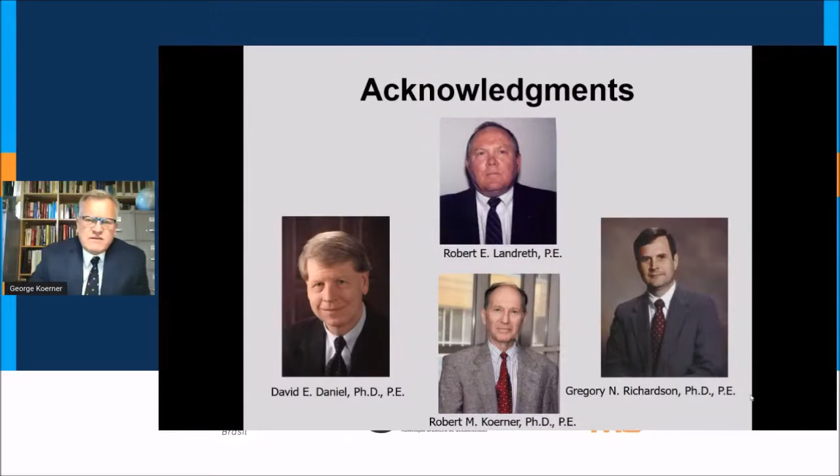For this work, I have to acknowledge these gentlemen, Professor Daniel, Professor Richardson, and Professor Koerner, all had a contract underneath Robert Landreth at the Risk Reduction Laboratory in Cincinnati. A lot of the information I am presenting to you is from their work, and I certainly need to acknowledge and thank them as my mentors.

As far as the background for this is concerned, there are publications supporting what I am giving to you. The reference I would suggest you obtain is the Daniel Koerner Waste Containment Facilities. It's an ASCE publication. However, you can also get this document, just about 90% of it, free of charge from the US EPA off of the internet.

The objectives here, and we have to be very clear what the objectives of all this work I'm describing to you is, it's certainly to minimize leakage, and the emphasis here is on the word minimization. Realize that the target is to get no leakage, but in truth, the targets are to get leakage below 50 liters per hectare per day, or that equals 5 gallons per acre per day.

The QA personnel on site, whether they be field technicians, inspectors, or QA monitors, are there to improve the state of the practice of what's going on, and also to help out with communication of the stakeholders on the project. And please realize that we are protecting the environment. We are truly stewards of the environment, and it's our task with this series of events to certainly minimize the risk to the environment.

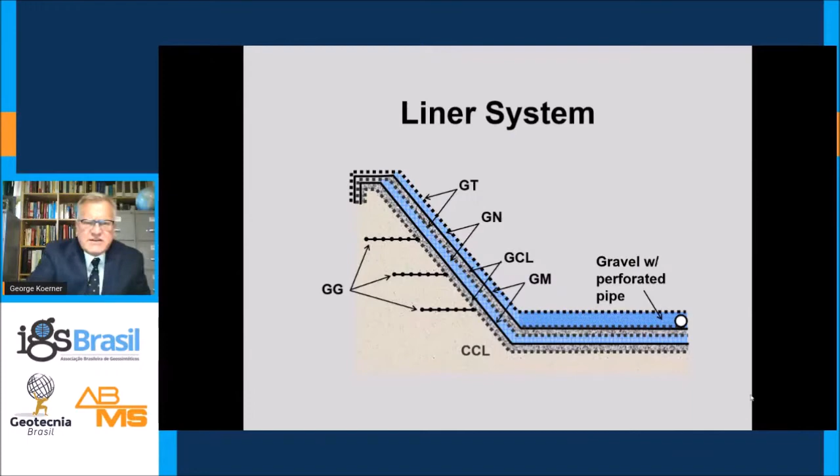Liner systems that are out there, I realize they're different depending on where you are, but double composite liner systems are typical in the United States. Here you see that in cross section. We start from the ground up, the subgrade, and then typically a geomembrane, GCL, then a drainage net, a geotextile over top of that for a filter system.

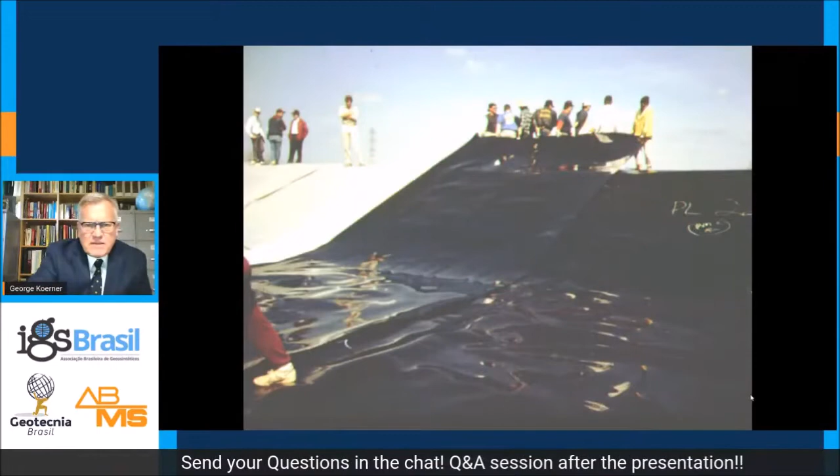This is the detection system, then another membrane GCL, which is a composite liner system over top of that. And here you see the entire liner system in its glory. You see the subgrade soil, the GCL, the geomembrane, the net, the textile, the GCL, the membrane, and then a heavy needle punch non-woven textile system. This liner system is replete with geosynthetics. We're typically doing long longitudinal cells, and it's staged and managed construction.

Now let's go to the top side. You see again a composite liner system, typically a GCL with a geomembrane over top of it. You have a gas venting layer underneath that. And then top side, you typically have a drainage geocomposite and then some sort of veneer reinforcement over top, and quite possibly a geosynthetic erosion control material over top of that.

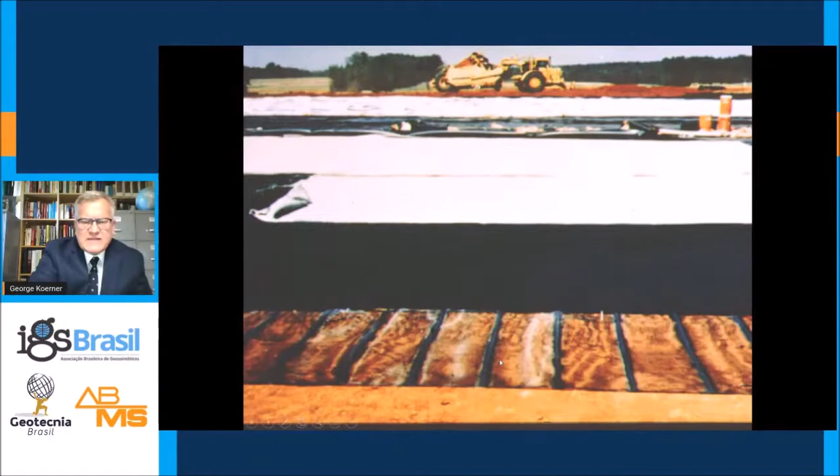They're complex covers as well. This happens to be at a low-level nuclear facility at Savannah River. You see the cross section. The geogrid was even installed for minimizing differential settlement in the cover. So you have the cross section of the landfill. Here's the cover system. I even held back a little bit.

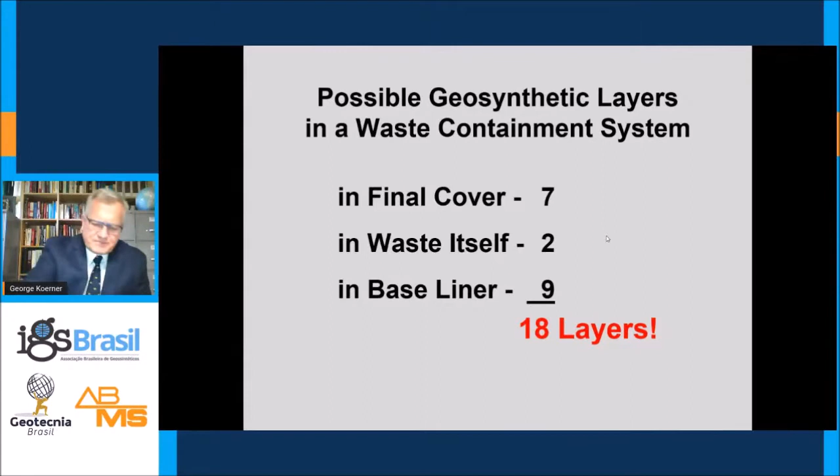There could be geogrids or geocomposites inside the waste mass if you wish. But at a minimum, the final cover typically has 7. Inside the waste could have 2, and then the base liner has 9. That's 18 layers, folks, of geosynthetics. And if you're in the waste containment business, I argue that you're in the geosynthetic business. You have to be competent in this, and you have to know that these materials are tricky. They're not self-evident, and we'd like to show you some of these tricks in regard to this presentation today.

When you have barrier systems, they typically in a natural material were compacted clay liners. For geosynthetics, they're usually geomembranes and GCLs, or a composite of the two. The barrier system geomembrane-CCL, and then geomembrane-CCL-GCL, is quite typical. As far as drainage layers are concerned, they're typically sands and gravels in the natural environment. These have been replaced in large part by textiles, nets, and geocomposites. In regards to filters, we typically have sand, and now we have a plethora of geotextiles which can be used in this case.

You should understand the organizational structure of the QA component, QC component. These are the stakeholders, or the players, so to speak. You have an owner of the facility, a designer of the facility, the QA organization, which is typically separate. Then you have a permitting agency - it could be both state and federal - a project manager and contractor, and then obviously the soils component as well.

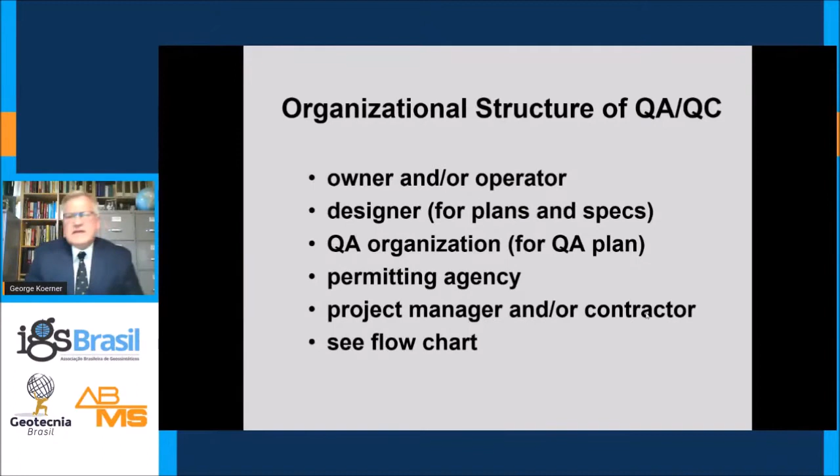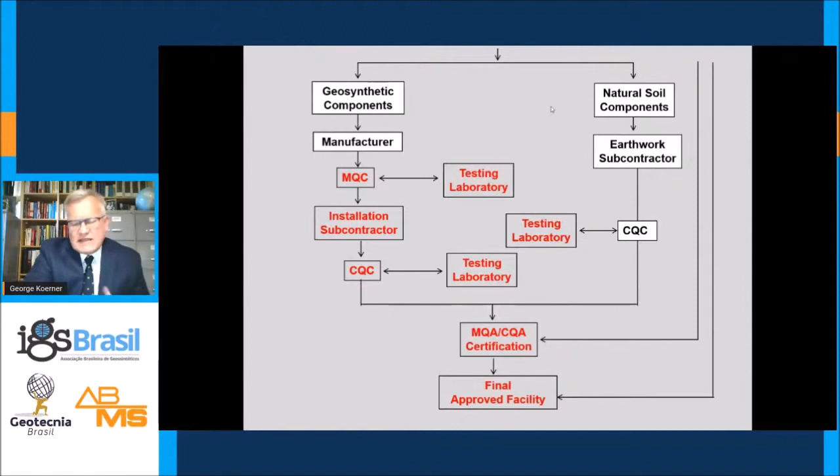This EPA document shows this flow chart and the interactions of these different stakeholders. You see the initial portion of the chart here, and then subsequently the flow chart breaks into two paths, one with geosynthetics and the other with natural soils. It all has checks and balances associated with it, and all has approvals of the facility, both by the owner who pays for it and subsequently the regulator, which finally approves it.

These stakeholders typically have a minimum qualification associated with it. The designer typically has a PE license. The manufacturer has experience, and typically there's a given number of 1 million square meters of material produced. The installer has experience as well and might have a certification. MQC is typically ISO 9000.

MQA - the regulations are typically silent in this regard, but we're seeing them being pressed a little more as far as CE marking. CQC, as far as construction quality control, this is IAGI certified. We're seeing the installers, and many in South America are having this IAGI certification. And as far as the CQA, PE or GCI ICP certification for the techs.

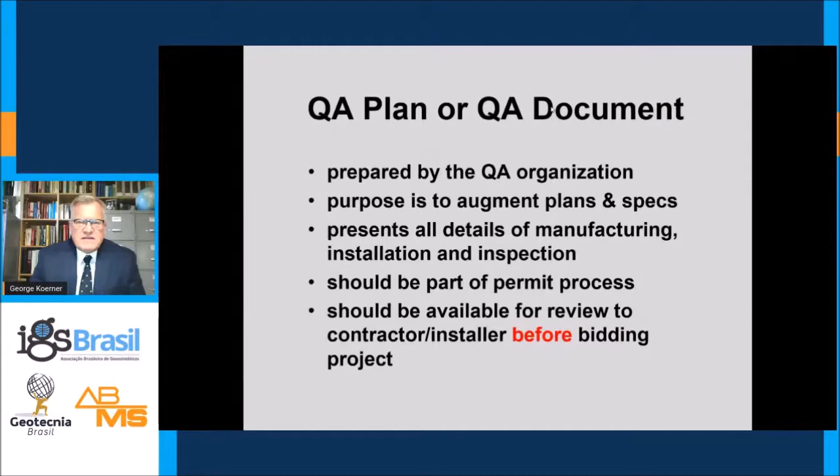There should be absolutely no surprises once the dirt starts flying or the polymers start flying. There is much documentation associated with this.

Daily inspection reports, daily summary reports, inspection and testing reports, any problems and corrective actions, drawings and records, photographs, final document certs, document control list, storage records, and on and on.

All of this is now being monitored by project managing scheduling software. Just like we're using remote and virtual ideas, this is paramount now in construction quality assurance. You see people out there with laptops and iPads making these documents, and there's a whole cottage industry supporting that.

Project management and scheduling involves meetings: a pre-bid meeting, resolution, pre-construction, and progress meetings. All of this, which I've just described to you, is freely available in the EPA 600 R-93 document, which is available online and will give you about 90% of what the ASCE Koerner Daniel document gives you.

So that's a brief introduction, just a view from 10,000 feet of what we're going to talk about in this presentation. I realize most of you on the line are very familiar with geosynthetics and containment systems. However, I would be remiss if I didn't go through it a little bit to get everybody on the same page about these polymers used in below ground construction.

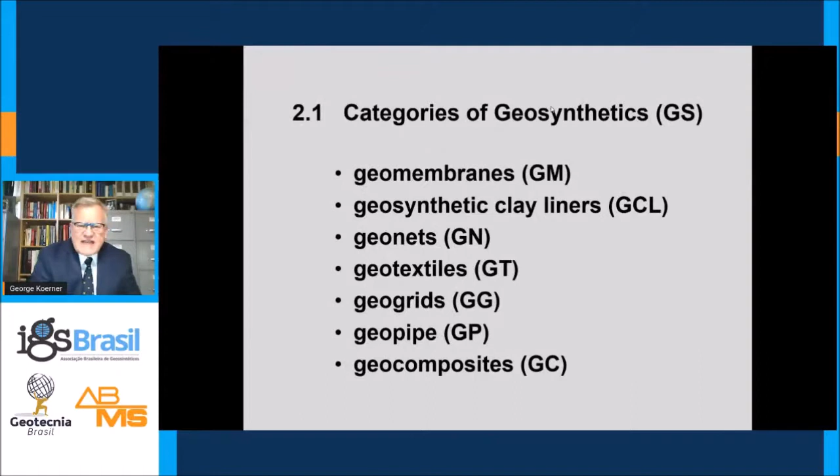Typically, the categories are membranes, GCLs, nets, textiles, grids, plastic pipe, and geocomposite. What I'm going to speak mainly to you about is the geomembrane, which is the polymeric barrier used in these containment systems. It can be smooth or textured.

It can be scrim reinforced. It can be different colors. Most of them are black, but some are white, and we'll go through all of that.

There is GCL, which is typically bentonite clay sandwiched in between two different geosynthetics. This clay swells profusely. It can absorb 300% moisture content, and it supplements or replaces a compacted clay liner, and is used with the geomembrane as a composite liner system.

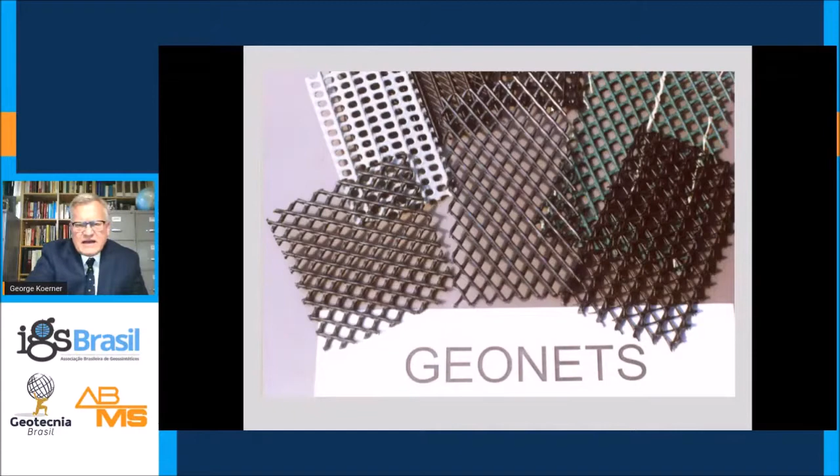You typically have geonets, or in Europe, they're called geospacers. These materials are three-dimensional, and they can transmit fluid, either gas or liquid, in the plane. They have a transmissivity associated with them. There's biplanar as well as triplanar nets, and it works well for leachate collection and removal systems, as well as detection systems.

Probably the oldest of the geosynthetics are geotextiles, with two major varieties: non-woven and woven materials. They can solve a plethora of different issues, and certainly are well received and well used throughout waste containment.

Geogrids are three different types: punched and drawn, coated, which is typically polyester, and strap type. They almost always reinforce the soil.

Soils are notoriously poor in tension. Geogrids are excellent in tension. The composite of soils and geogrid can be equated to concrete and steel. Same scenario there—the geogrid, like steel, is taking the tensile forces.

There is plastic pipe. This can be perforated or smooth. It can be corrugated. Typically, the pipes that are available are polyethylene, HDPE, and PVC.

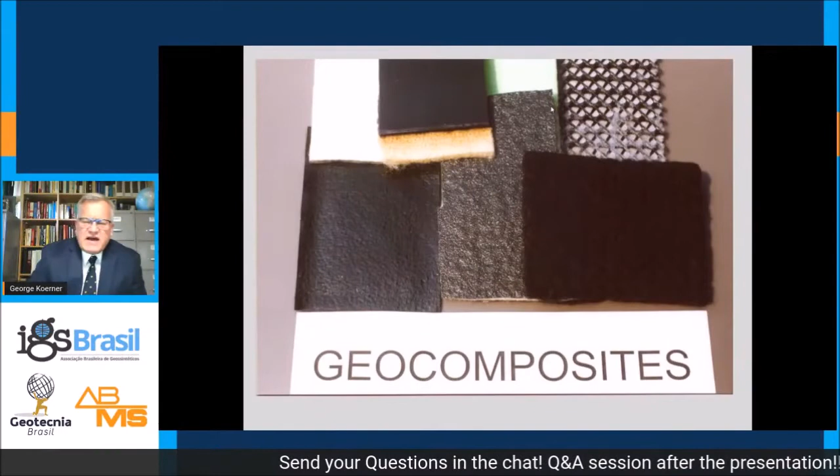You then can have a composite of these materials, which are addressed, forming just the endless array of geocomposites. You should know the primary function. Here you see the different geosynthetic types that we went through.

The primary functions are separation, reinforcement, filtration, drainage, and barrier. The geomembrane and GCLs will behave as a barrier. The net will behave as a drain. The textile can behave as many things, and it could even behave as a barrier if you coated it with a bitumen.

Geogrid is reinforcement. Geopipe is drainage, and then obviously a geocomposite acts as all of them.

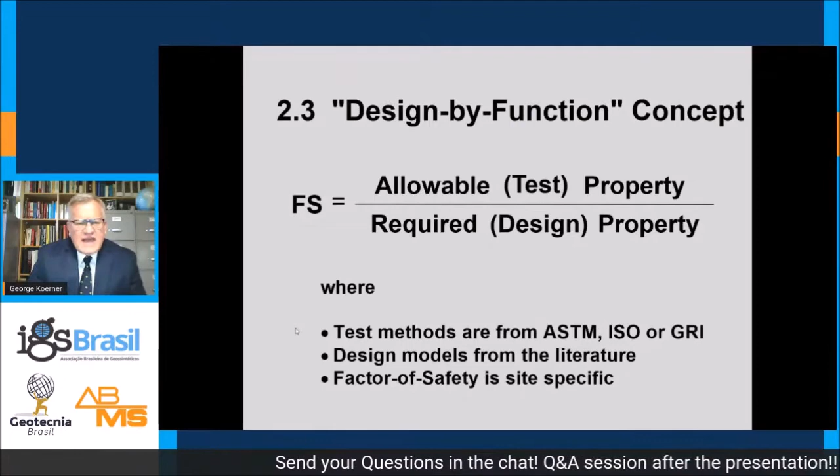This equation is how I would define an engineer: it's a factor of safety equation with a test property in the numerator. In the denominator, you have a design property. The test value is typically an ASTM or ISO test method, and the design value is typically, these days, a computer program.

You have testing issues. These are utilized through Committee D35 in ASTM or ISO TC 221. There are many standards which are available to you and essentially called out in specifications.

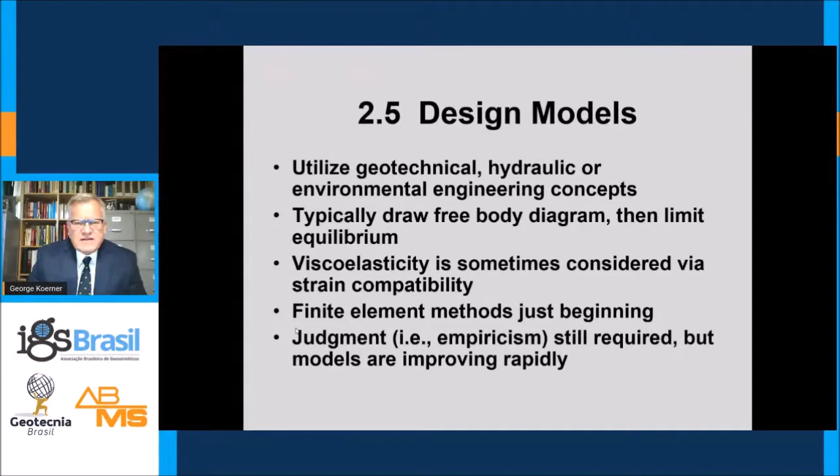As far as the design models, which are in the denominator of the factor of safety equation, they're utilizing geotechnical, hydraulic, and environmental engineering concepts. There's a litany of different programs available to you, and certainly some engineering judgment has to be used, not only in data entry, but also in the analysis of this.

When you go into a factor of safety, there are two critical elements associated with it. One is time—are these facilities temporary or permanent? And the other is severity—non-critical or critical. And I talk to people as far as criticality.

In regards to generic specifications, the current thrust is to move towards this and uniformity. This is a major effort at our institute, and please realize on geosynthetic-institute.org, these specifications are available to you. I should point out to you that currently these specifications are being translated into Spanish. Certainly they can be translated into different languages around the world, and Portuguese might be next.

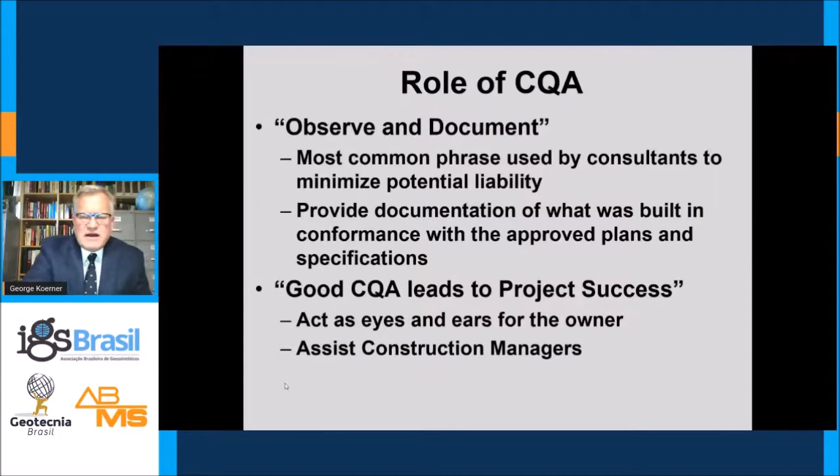The role of the QA personnel is certainly to observe and document. They're basically the owner's eyes out in the field. The consultants that provide these services are certainly trying to minimize potential liability, and they're providing documentation of what was built and did it conform to the plans and specifications. Good QA, though, is more than that. It leads to project success, and certainly it's an assistance to all the construction managers out on the project, and ultimately the owner thinks that it's a worthwhile expenditure.

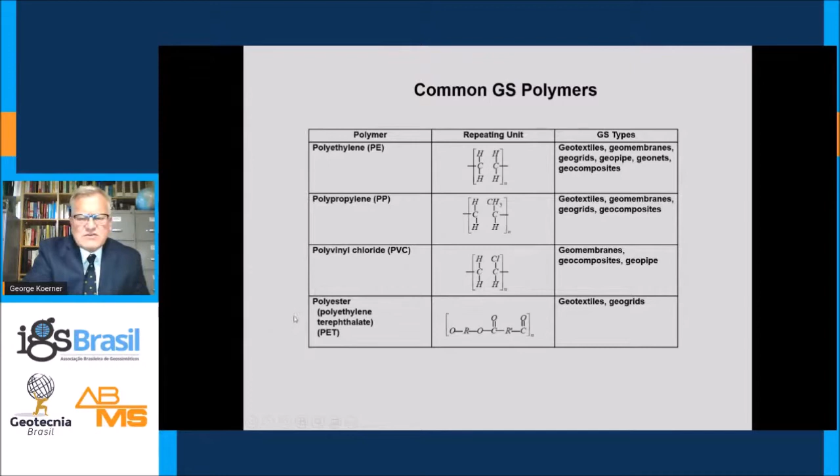Okay, now moving on past geosynthetics, I want to get into the geomembranes. These are polymers. These polymers are characterized by molecular weights which are extremely high, in the 10,000 to 100,000 range. You realize that geosynthetics use very few of these polymers, almost commodity polymers. The two materials up in the top are polyethylene and polypropylene. These are characterized as olefin plastics. We do see PVC and polyester used, but to a lesser extent than the olefin plastics.

Please realize I say HDPE, but this is a formulation. There's a recipe associated with this. The vast majority of the HDPE or polyethylene is resin, 95 to 98%. This material does have carbon black and additives associated with it. These additives and carbon black are only in there a few percent, but they're the expensive part of the formulation, and certainly needed to make these materials last a long time, even in harsh conditions.

Here you see the polyethylene pellet, which typically arrives in rail cars or Gaylords at a facility. You would like to mix the carbon black, but please realize these additives and the carbon black, the blocking agent, are typically in powdered form. Therefore, they're typically mixed with a carrier resin and form what's known as a concentrate.

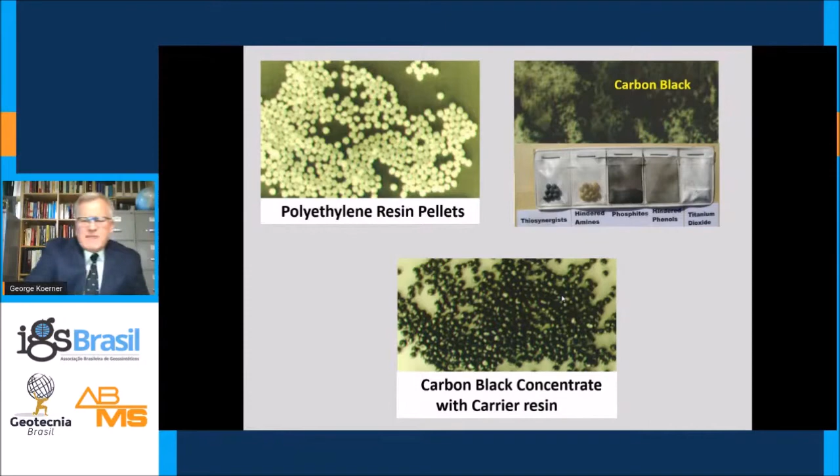A manufacturer needs to assure that this material is quality material and conforms to his internal specs. He also wants to make sure that this material is good material and what he paid for. So typically the quality assurance before the manufacturer will release this material into his silos at the plant is twofold: one is melt flow index and the other is density. They'll do these cursory checks to make sure the material is quality and what they're paying for.

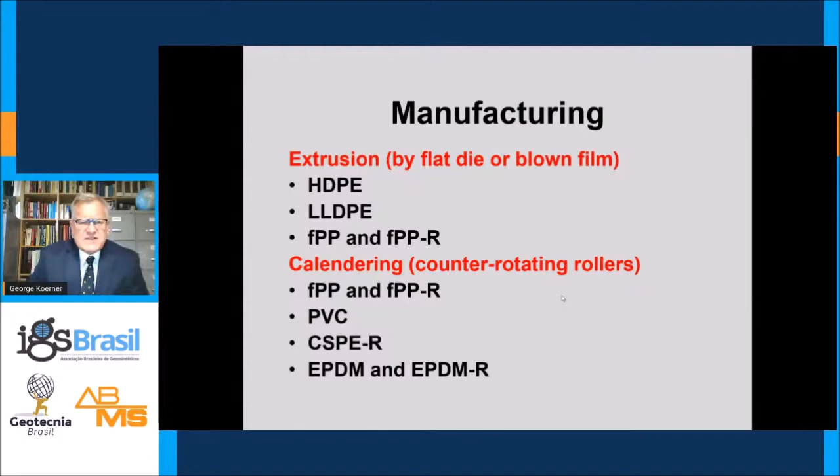Now we'd like to produce that geomembrane. And to produce that geomembrane, you typically have extrusion processes or calendering processes. The olefin plastics that we showed you are the extrusion, flat die and blown film, and we'll show you both of that. As far as the calendering process are concerned, that's typically PVC and also the scrim reinforced materials.

So we take the resin and the concentrate, which is the carrier resin, and the additive package and the carbon black, and then we have to make sure that we address regrind or rework. This is allowed at 10% into the letdown. And this is important, especially from a financial perspective for the manufacturer of geomembranes. However, this material has never seen use. It most often has never left the factory. This is quite a bit different than recycled material or reclaimed material.

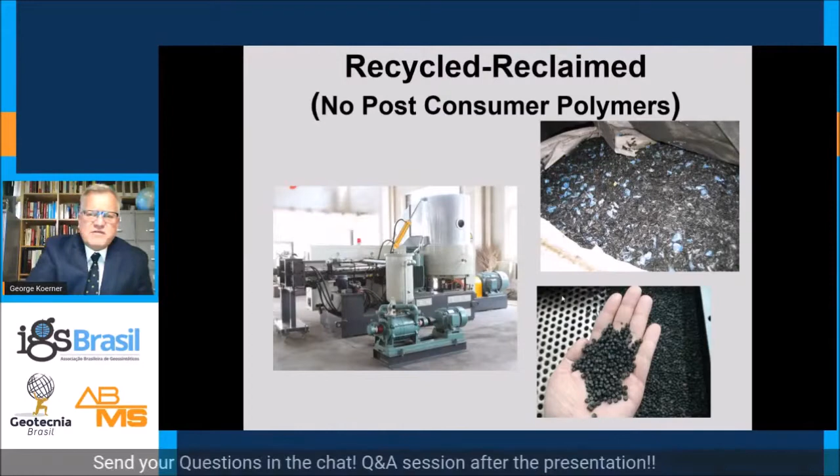Absolutely no post-consumer material is allowed in geomembrane manufacturing. This is strictly forbidden, even if it goes through a pelletizer and a washing mill. It's tough to detect, but certainly the formulation has to be guarded and protected against this.

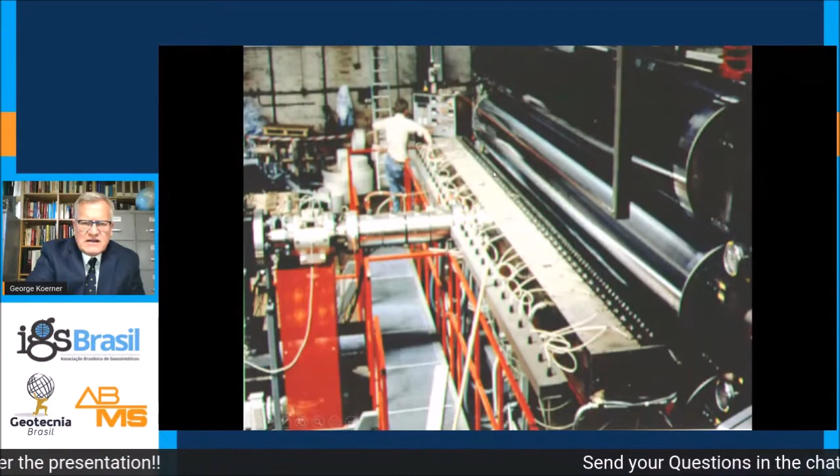Now we'd like to introduce that letdown and regrind into the extruder. That extruder is basically a large Archimedes screw with heaters on the side of it. It then feeds a die. In this particular case, it's feeding a wide mouth die. This die lip is about 10 meters across, so it's a very large die. It can be fed by multiple extruders and is spread out quite wide. Here you see the river of polymer, the river of geomembrane that's being produced.

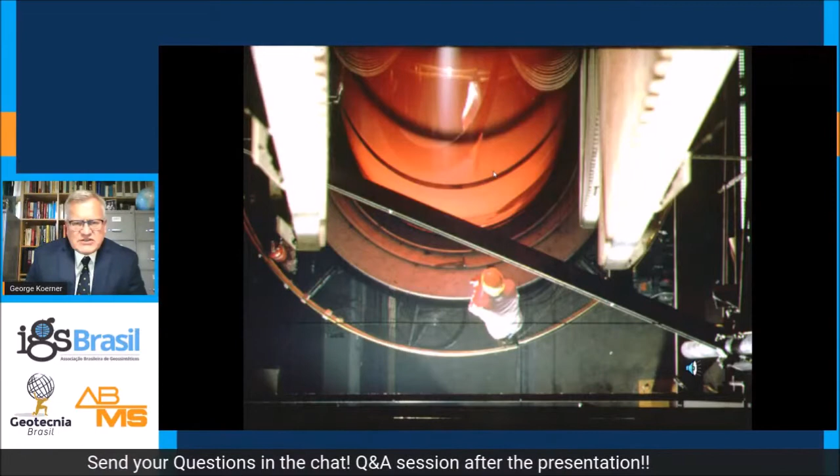It's on the cooling rack after the calendaring. This is very different from blown film extruding. Now the die lip is circular. We're looking down on it. The geomembrane is orange, it's just for a contrasting color. It's nice pictures to take.

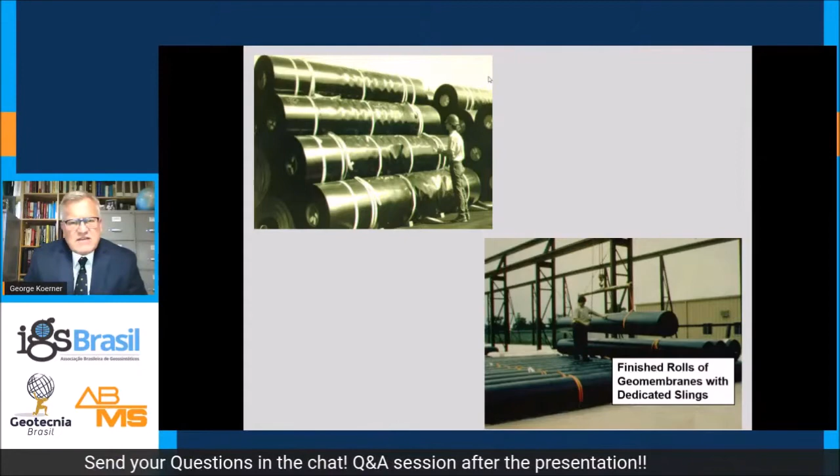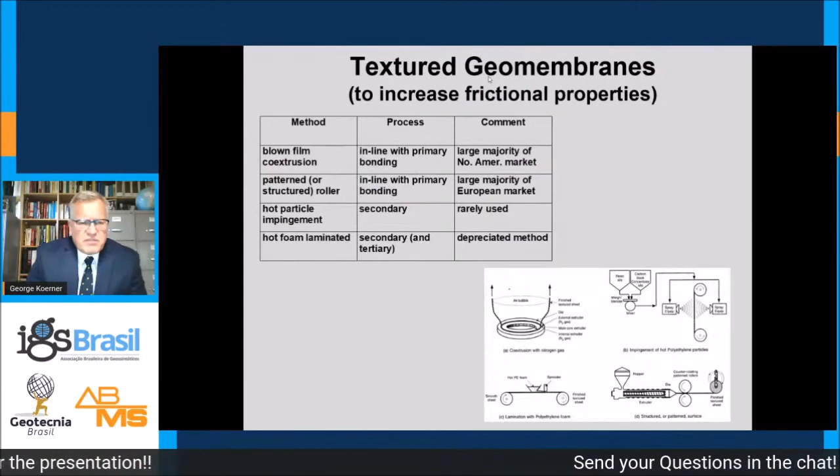As far as texturing material, you have 4 different methods to texture. For blown film, it's typically a nitrogen expulsion. You can have a patterned roller for the die cast, or hot particle impingement. I've seen that in Chile as well as China and Europe as well. Hot foam lamination I see less and less of. That was a favorite of a manufacturer here in the United States, but we see less of that process.

The texturing is key for increasing the frictional interaction of the surface. Here you see the blown film in the upper diagram, and here you see a patterned texturing process. This has revolutionized the industry, particularly on steep slopes. You can have slopes now much steeper than 3-to-1. We see 2-to-1 as the norm, and this is obtained with textured geomembrane.

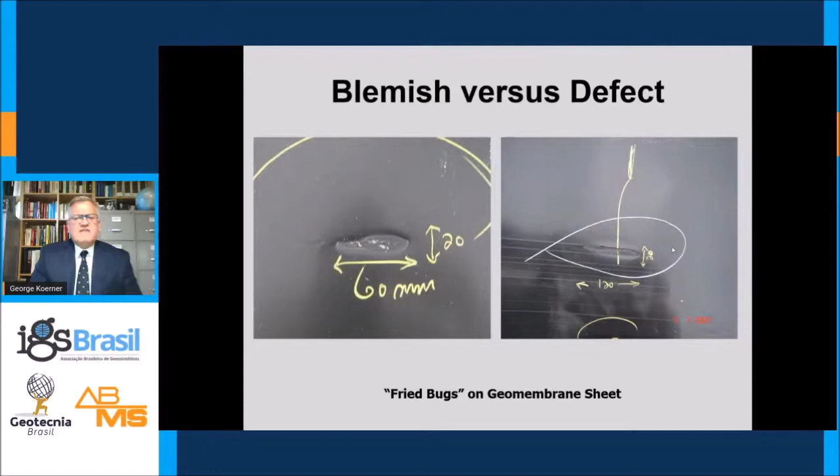Okay, I showed you a perfect world in those photographs. There are problems which are associated with the manufacturing of geomembrane, and certainly the QA personnel have to pick up on this. Things that are out there - I won't show you all of them - but when an imperfection like this occurs, you have to establish, is this a defect or is it a blemish? The difference in definition is a defect is something that does not cue into the specification. Values fall below the specification values. Obviously, in this case, if you would run a tensile test or a thickness test, this is much more than a blemish. It would certainly be a defect.

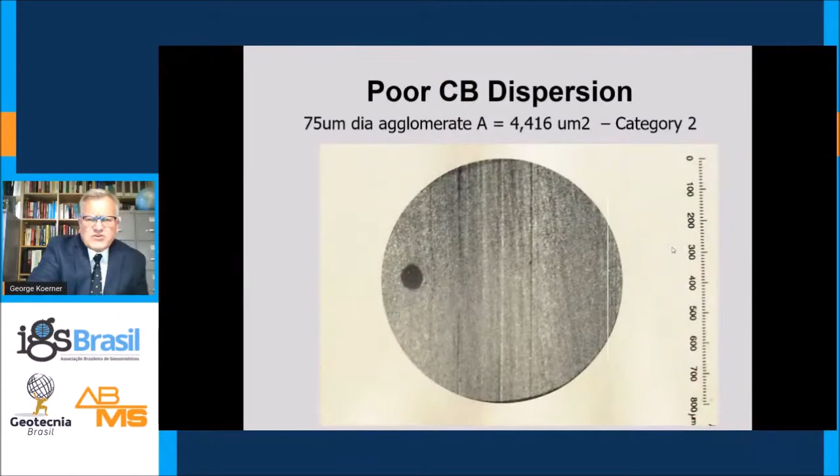In regards to textured material, if you're not cleaning the die lip, you can have excess material which can agglomerate on the texturing surface and give problems. You can have gels or dirt inside this. The screen is not working well inside the extruder, and these foreign materials enter the sheet, which give problems and rise to stress cracking. You can have problems with carbon black dispersion. These big carbon black agglomerates are problematic and certainly need to be taken care of.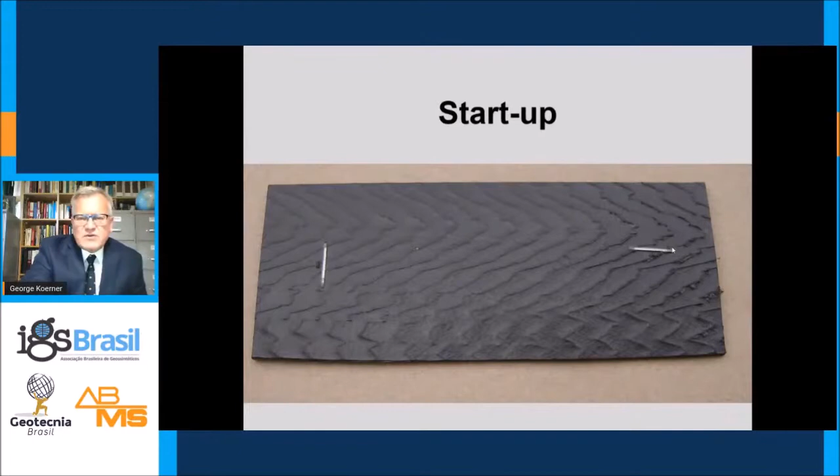If you have weather with a lot of humidity, or a problem with water dripping on the equipment, it can bubble the material and cause problems. You also have startup runs, which are between different materials, changing over from linear low density to high density, or changing in thickness. There could be startup issues.

You don't want this material on your site. There could be problems with AO packages, which are found out in long-term problems. There could be problems with inconsistency or tiger striping of the material. Certainly you didn't pay for this. This was not the material shipped for direct shear testing, and certainly is problematic and should be avoided.

Realize that there are specifications. These specifications are typically generic, which are the best specifications. You don't want specifications from a manufacturer. It's not that they aren't honest, but it's like the fox looking after the hen house. You need somebody independent producing these specifications. They typically address properties, test methods, units, limiting values, frequency, and then there's a warranty.

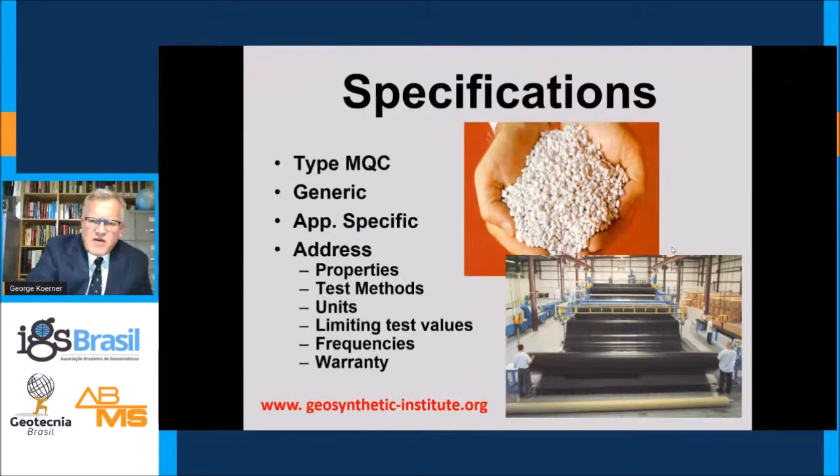There are generic specifications available to you. Our geosynthetic-institute.org provides them. They're openly available to you, and as I said, they're being converted into Spanish now and hopefully other languages going forward. The test methods that are called out in these specifications should be tested by a manufacturer who's accredited, and also by a third-party laboratory which is accredited as well. They should be accredited to ISO 17025.

Certification includes CE marking, which is available particularly in Europe, but seen all over the world. There's also certification of the personnel looking after the site—their experience, references, and knowledge are tested, followed by continuing education. It's a very organized system set forth by the US EPA, and hopefully it will take hold throughout the world.

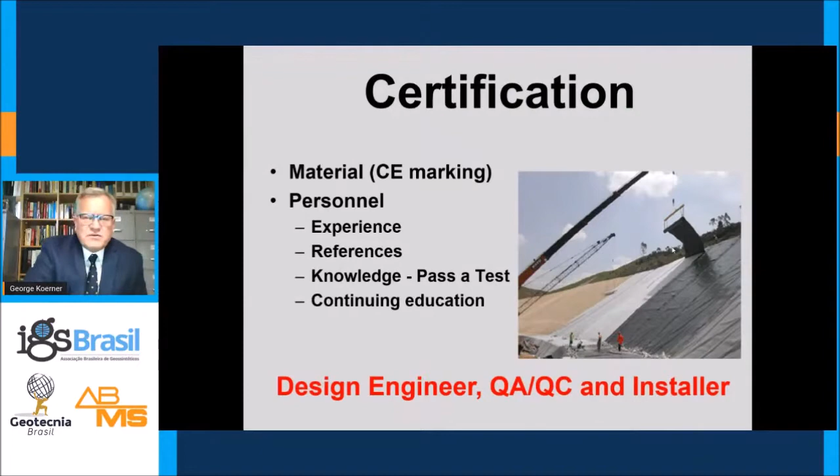Now we've manufactured the material and want to ship it to the site. This is typically done in enclosed trailers or flatbed trailers, depending on the equipment for loading and unloading. QA sampling is best done at the plant. Transportation costs have become extremely expensive, so we need to head off any problems as soon as possible. That testing is typically the manufacturer's responsibility and occurs prior to shipping so you can inventory and hold any off-spec material.

QA sampling in the field is certainly not as efficient, but sometimes it's called for. Please realize that a failure in field QA sampling will delay the project significantly, and maybe the manufacturer doesn't have material inventoried to ship directly to the site. Who pays for the shipping back and forth? This has to be decided earlier on in the project.

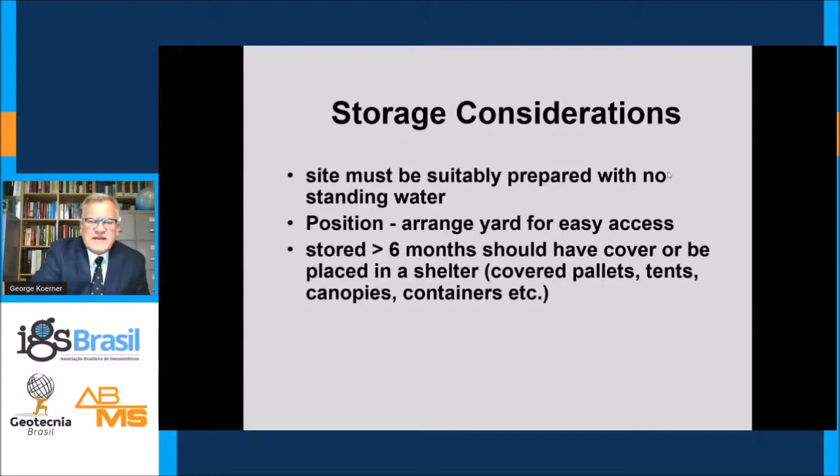If storage on site is greater than 6 months, you should cover the material with some sort of shelter—typically covered pallets, tents, canopies, or containers. I'm seeing this a lot more often; owners are buying large quantities of geomembranes and storing them on site for extended periods. This is no problem, but they must be stored properly and sheltered if it's over a 6-month period.

As far as field placement of the geomembrane is concerned, you have to prepare the subgrade. Follow the QA documents, follow the lines and grades—it has to be stone-free and flat. If you're in winter or near winter, late fall or early spring, there should be no frozen ruts. Tire deformation should be less than 25 millimeters; nothing can be greater than that.

Remove folds in any underlying geosynthetic, and then subsequently get a subgrade acceptance letter. This is something the QA personnel needs to obtain from the earthwork contractor, and it has to be signed off by the owner.

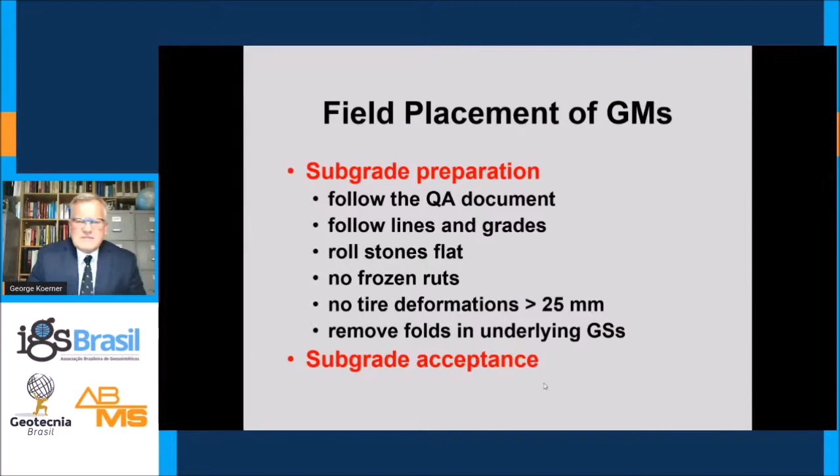To do this, you start with a site which could have some stony material, some greater than 25 millimeter size material. This material needs to be picked out—you can do that automatically with a stone picker or by hand. Please don't throw them; these laborers should have a bucket. They shouldn't be throwing particles onto deployed geosynthetics, obviously.

You then take a smooth drum vibratory roller and roll the site flat. This makes the compacted clay liner ready to receive the geosynthetics.

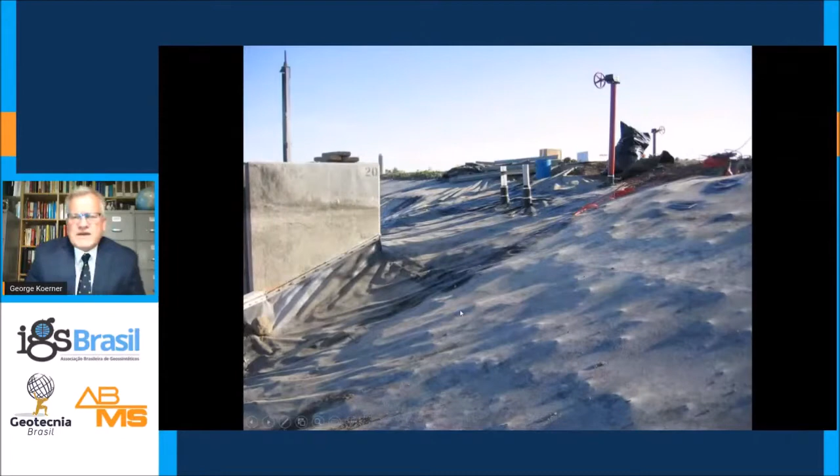This is totally unacceptable, and this geomembrane will be compromised over time significantly. It's an unacceptable way to install a geomembrane. You will have to protect the geomembrane when backfilling. Punctures by stones from both above and below are problematic. Cover soil must be free of stones.

If possible, the gravel leachate collection and removal system has to be separated from the geomembrane with a heavy needle-punch nonwoven or a puncture protection material.

Geomembrane also cannot be trafficked by construction vehicles. There is some discussion around low ground pressure ATVs. This has to be agreed on, though, prior to the job. The ATV typically requires special precautions, like entering the geosynthetic at a 90-degree angle, no fast starts, and no driving on and off the geosynthetic—it has to remain on there.

In addition, if the material is to be trafficked, it should have a minimum thickness of cover soil over top of it, typically greater than 300 millimeters or 12 inches. Some regulatory agencies, like the Corps of Engineers, want 450 millimeters or 18 inches. But all of this is specified in the QA documents, the QA plans.

In regards to the topside of the facility, the anchor trench detail is extremely important. This anchor trench is holding the geosynthetics topside. It has to be detailed in the plans and specifications, and it's critical for safety, particularly when you get greater than a 3-to-1 slope or greater than a 30-meter slope in length, 100 feet.

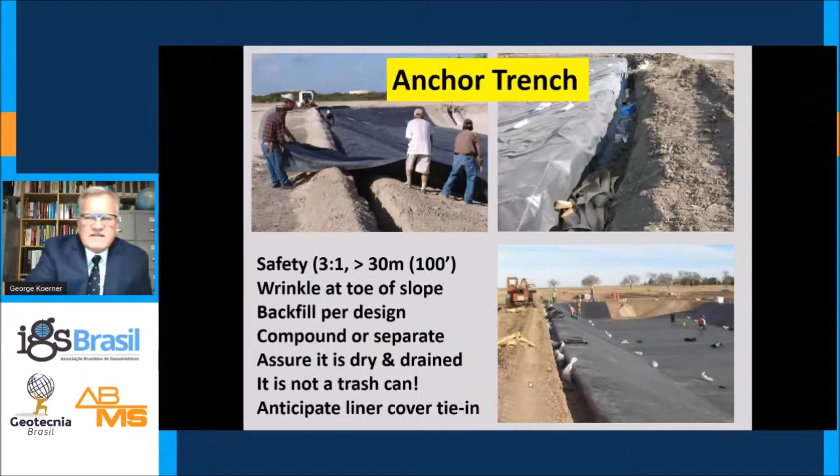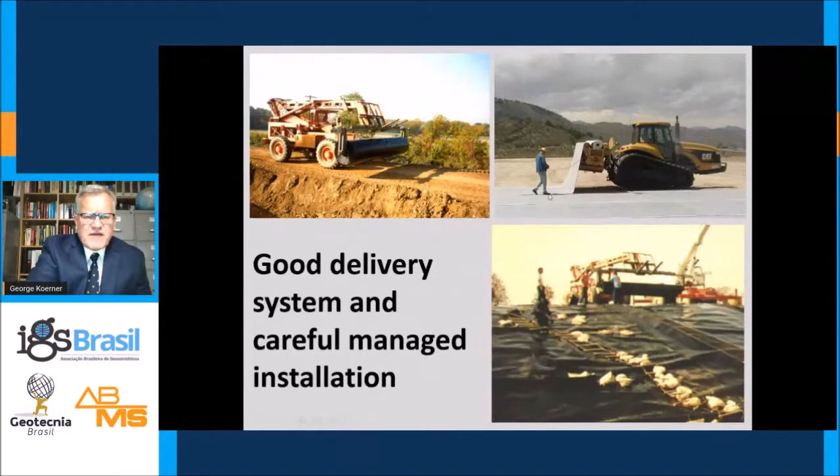Good delivery systems are shown here. This is typically equipment—a lull with an articulating boom and a spreader bar. This equipment is operated remotely. There's a toggle which the installer uses while walking in back, making sure the overlap is correct. This is certainly carefully managed and controlled throughout the system.

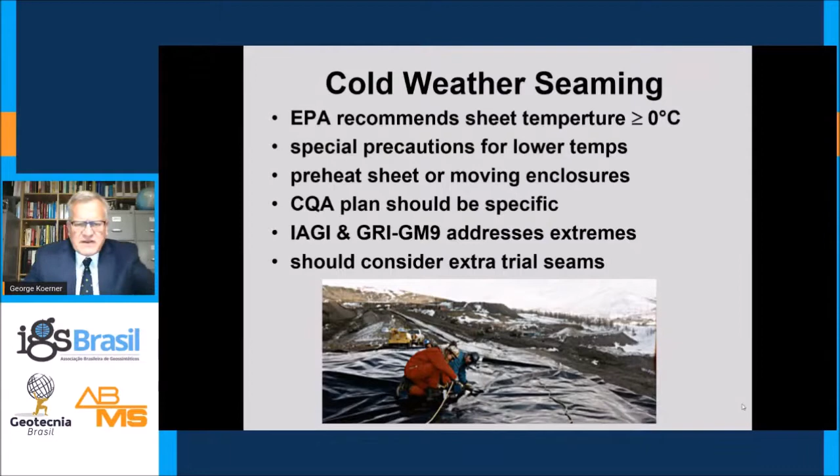You should address extreme weather, meaning extremely hot or extremely cold weather. There are recommendations in the EPA guidance documents which give you trepidation once you get colder than 0 degrees C, so the threshold is certainly at freezing. Special precautions are needed for lower temperatures. You can seam at lower temperatures, but you need to take precautions including preheating and a moving enclosure, and the QA plans need to be specific in that regard. There is direction in both IAGI and GRI GM9 which addresses these extreme conditions. In most cases, the QA personnel will have to consider extra trial seams. This is very important and at the prerogative of the QA personnel.

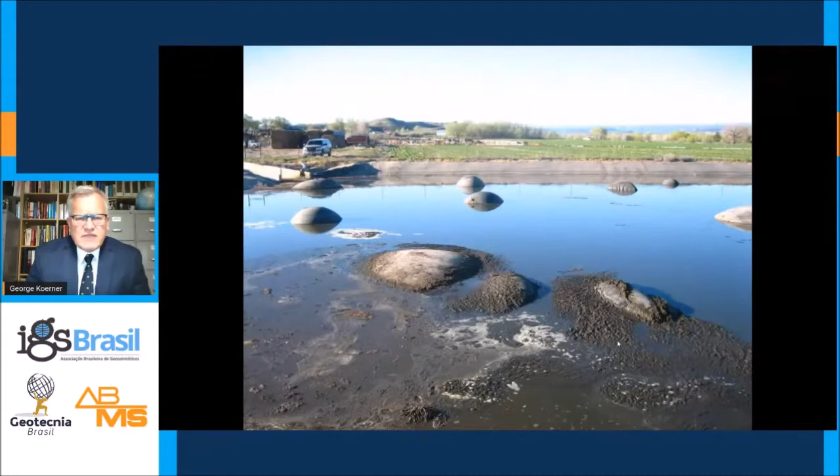Field placement of the geomembrane typically involves positioning or spotting, which is important. You should certainly minimize subgrade disturbance. There is a concern with textured sheet, I showed you the rub sheet or Houdini trick which is often used. There's also a concern with wind, since you do not want these materials to become a kite. There are many cases of wind displacement. The biggest item is not to leave the geosynthetic exposed too long. It should be managed with staged construction.

And certainly, what do you do when the material is damaged? Here is a case, and what is the prognosis of the geosynthetic? The geomembrane has been abraded, bent, might even be torn. The truck on top of it certainly hasn't served it well. Can you use that geomembrane? How many defects are you going to allow in a panel to still use this material? Do you not have enough material on site that has to be used in place of this material? Please realize these contingencies all need to be discussed before they occur. You don't want to be arguing about this after the fact.

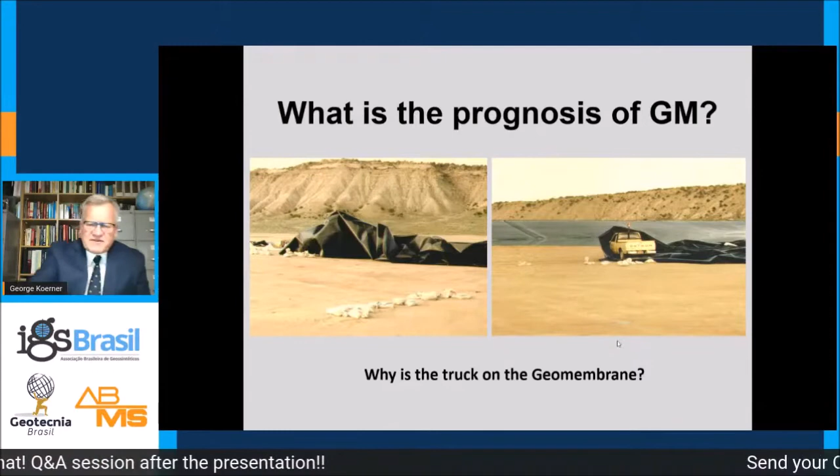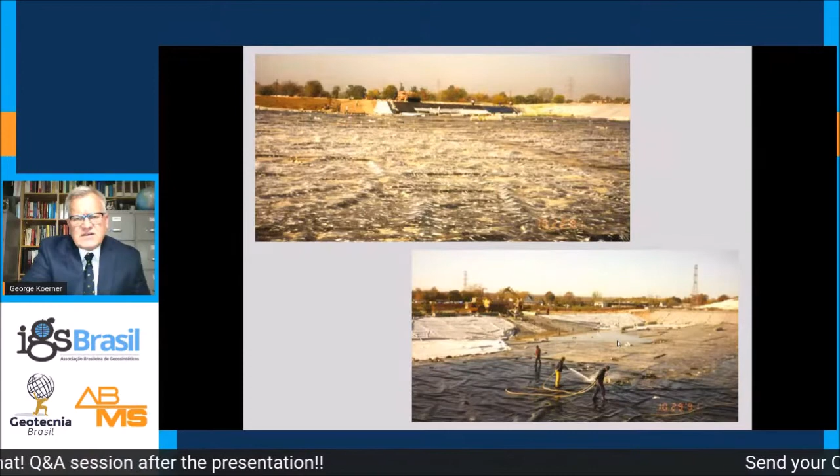Problems of exposed material are certainly wind, expansion or waves, accidental damage, intentional vandalism, or birds and seagulls. Here you see nature playing a dirty trick on us. The membrane is exposed, and all this material will need to be cleaned off before the drainage layer could be placed over top of it.

There is a situation in regards to waves and wrinkles. Please realize most liners which are placed are composite liner systems of a membrane being placed over top of clay or a GCL. You can't entomb these waves because you will not have intimate contact. These waves or wrinkles fix into position, and this is a concern with residual stress and mini dams. There's excellent work that has been conducted on this. I point you in the direction of Te-Yang Soong's work with Bob Koerner. There's also work at Queen's University with Professor Rowe and Brachman, which are very good in regards to this work.

This is what we're talking about, waves and wrinkles. This one here in the lower picture is massive and will not dissipate over time. Three situations which I present to you: one, a compacted clay liner alone. The reason you're using composite liner systems is that the wetting front is much decreased if you get a hole in a geomembrane over top of a GCL. If you have, though, a hole at a wrinkle or a wave, this fluid can move in the Z direction in and out of the board in an entombed wave and radically change the leakage rate at your facility. So ultimately, you would like a press fit of the geomembrane against the underlying clay. This occurs in all geomembrane types. Waves accumulate most in stiff, thick geomembranes. They occur in flexible membranes too, but they're smaller, though more numerous.

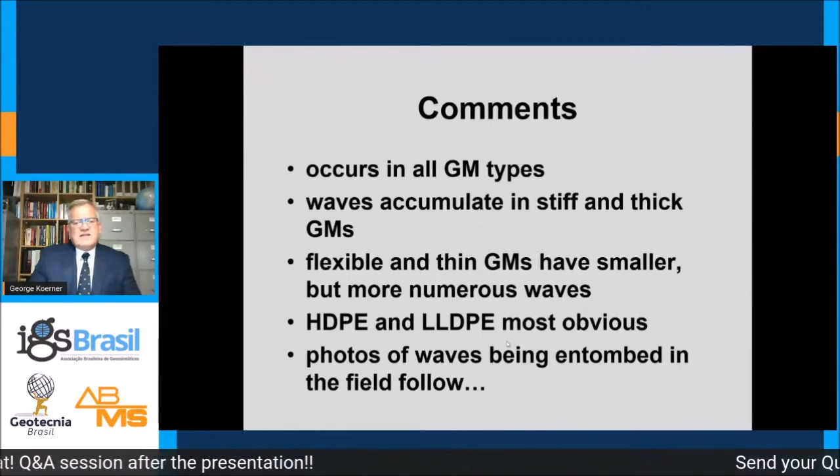They're very obvious in all the polyethylenes, both HDPE and linear low density, and entombing these waves is problematic. You have to be very careful when covering this material, particularly with leachate collection and removal stone. The QA personnel make sure this is flat. In this particular case, the wave is getting too long. It needs to be cut out and flattened, or you have to wait until a cooler period of the day until you continue this covering.

You might want to stage this work incrementally so you get distributions of the wave. There's a right way to do this and a wrong way, and certainly you need a press fit of the geomembrane against the underlying material. Concern over entombed waves is certainly lack of intimate contact, which we described in the theory.

Mini dams which are forming, and with sites that have limited hydraulic gradient thresholds, this is problematic. Stress concentration is problematic, and also distortion of the underlying clay or GCLs. It's one thing to present a problem, it's another thing to give solutions to this.

Bob Koerner very nicely put this table together with the way to solve the problems. Certainly that push, accumulate, cut, and seam approach is labor intensive, but it works. Fixing berms and piles - this is available over in Europe. A company by the name of Schicketanz has certainly championed this with thick geomembranes in Germany and Austria.

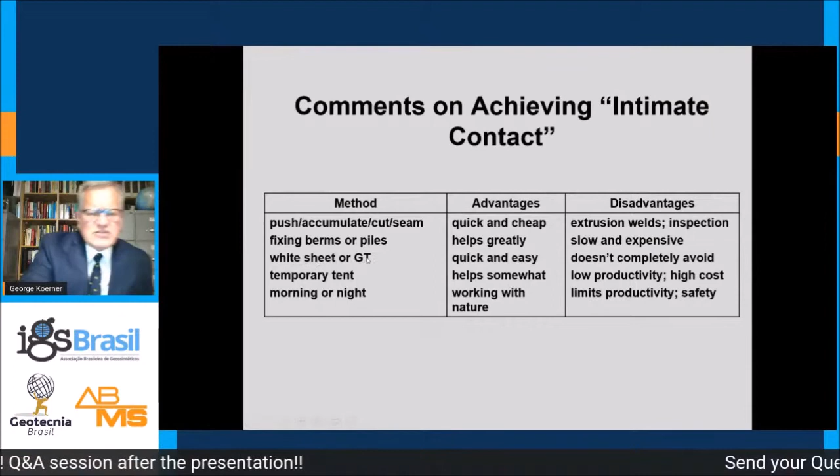White sheet and white and light colored geotextiles help. If you decrease the surface temperature of these membranes, you certainly have less wrinkling. If you can control the environment either with tenting or support structures, or do work in the morning or late at night, this is certainly proactive and will help you in regards to intimate contact, which is extremely important.

Okay, now we're moving on to seaming and joining of these geomembranes. Leaks do occur due to poor field seams. Factory seams are much better. Details around penetrations are certainly very important, as well as around appurtenances.

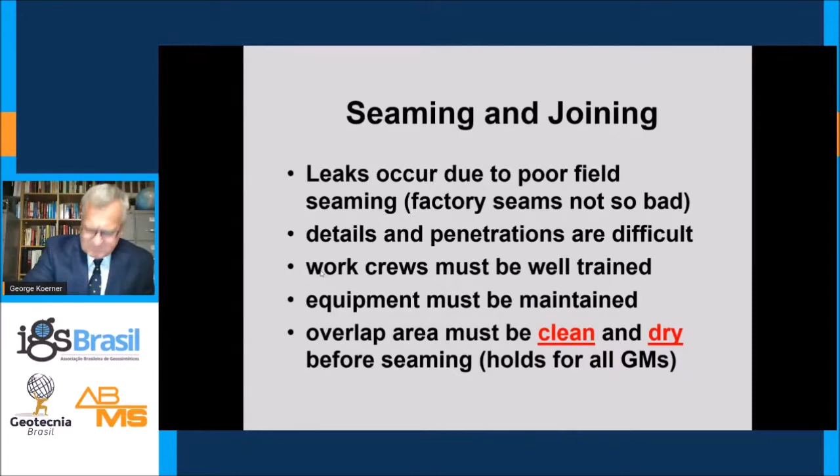The crew must be well trained, and there is a requirement in some places that they're certified. The equipment must be maintained and is certainly tracked. These expert systems track both the operator and the equipment that they're using. In regards to the area to be bonded of the geomembrane, it must be clean and it must be dry. These are two very important factors, and it certainly is absolute.

Most of the membranes which we see, even textured membranes, have a smooth edge, and this is good for seam quality. Tie-in seams are quite ugly.

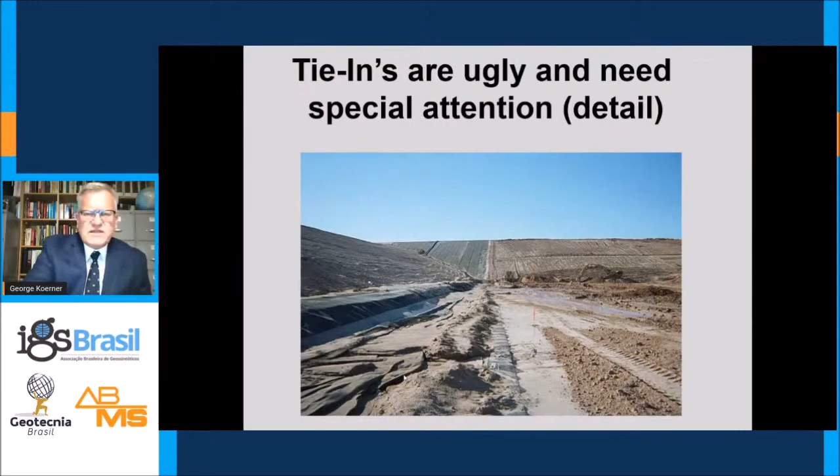As far as the seaming methods occur, it's very dependent on the type of materials which are used. The olefin plastics, which we described, are seamed thermally, either through extrusion or fusion welding. Fusion can be done off of a wedge or hot air. Chemical seaming with solvents or bodied solvents is done with PVC and chlorosulfonated polyethylene. Adhesives are typically used with EPDM.

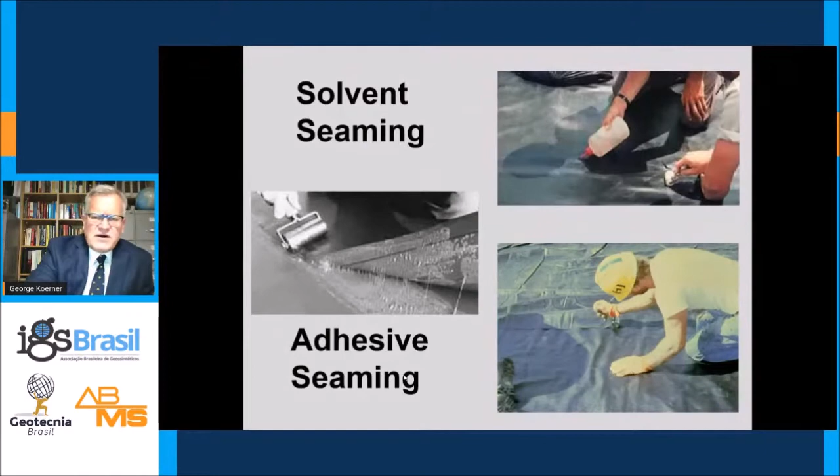Solvent seaming and adhesive seaming we don't see much of these days. Even PVC can be thermally seamed, although this is available to you, and we see it often in the roofing business, but not so often in the field business except with EPDM.

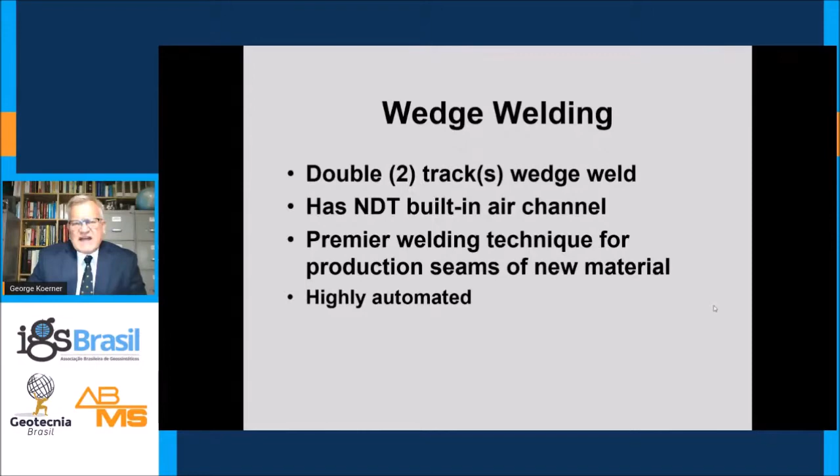This air channel is a non-destructive test which is built right into the material. It's certainly the premier technique for production seaming, and it is highly automated, and certainly is the best type of seaming that we see out in the field.

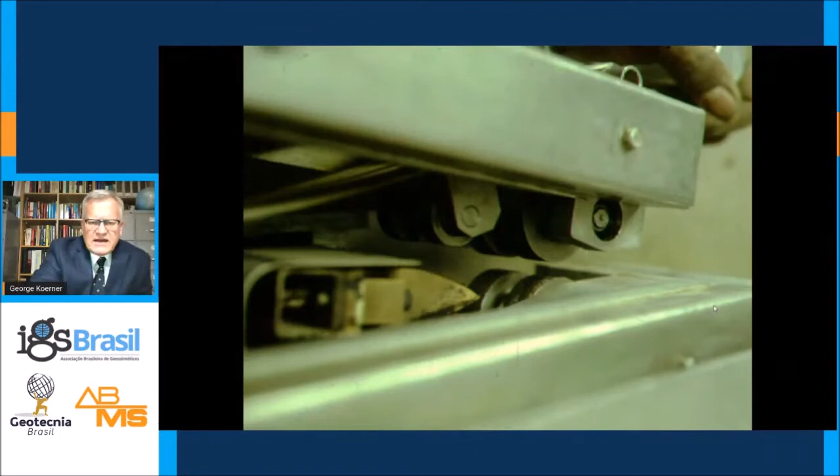This is the original patent from Pfaff, which was an Austrian firm. This was granted back in 1979. The big component of it was a Z-type frame with a movable wedge. You see the seamer here with a split nip roller, and the wedge is a brass wedge. The lower sheet is placed, the wedges move forward, the upper sheet is placed, and then the device is racked or moved to apply a normal pressure.

There are many different manufacturers of this equipment out there. You do have to qualify the integrity of the seam as well as the integrity of the seamer or the installer.

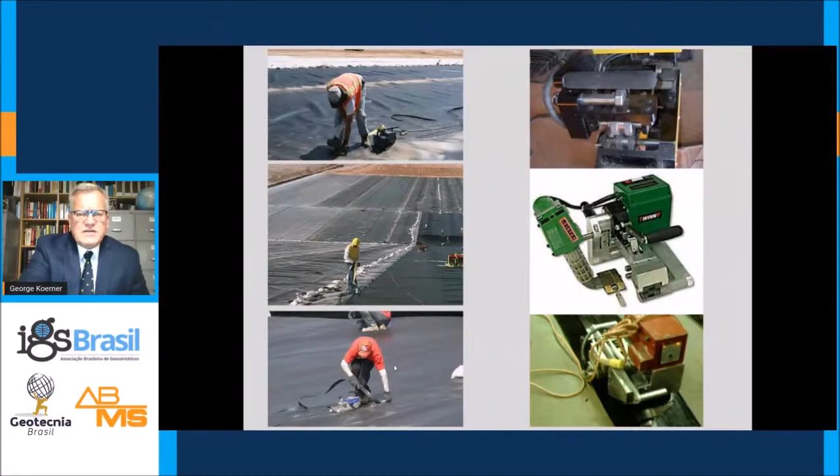The butt seams on the roll edges are typically done with flat solid wedges, where the longitudinal seams are done with split wedges with dual track hot wedge seaming.

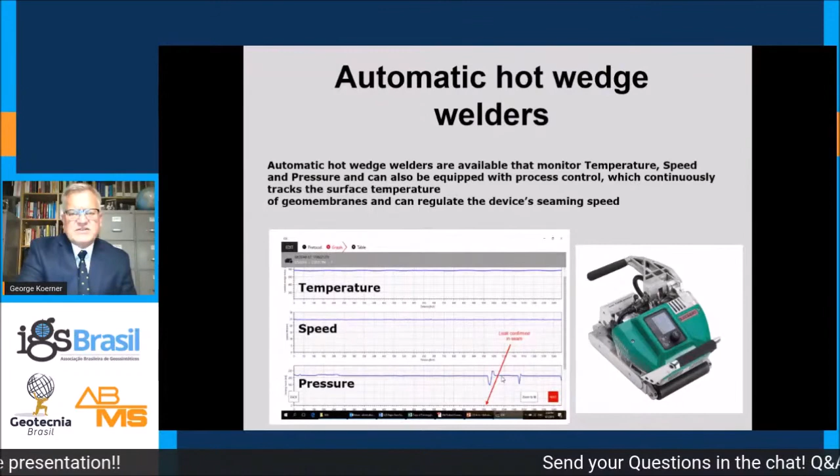These are now fully automated hot wedge welders. This automated or smart welder can record temperature, speed, and pressure. Any anomaly can be recorded, and then the QA personnel can focus on those locations where these metrics are not within threshold.

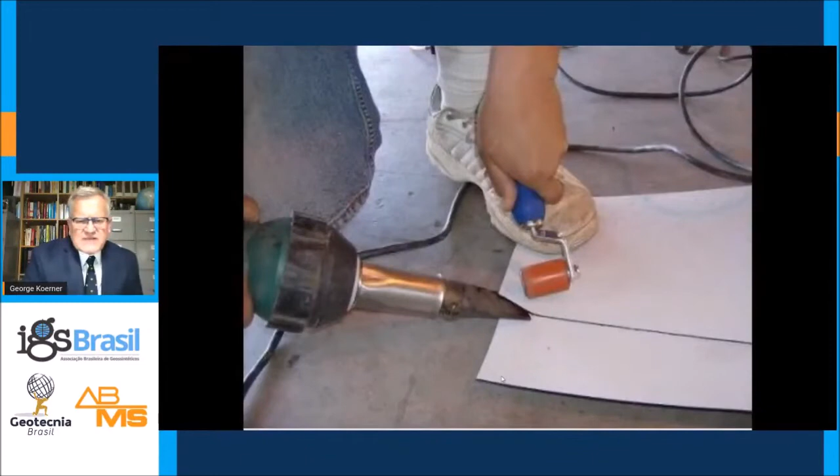It's a labor-intensive process, typically tack welding the material, then grinding the surface bloom off the material. You use an extrusion hot rod that's fed into the machine, and you have to cover over all the grinding of the material. This is what it looks like on site.

Again, back-breaking work, but certainly necessary for any repairs on site or details. The extrusion bead flows over a Teflon shoe and is smooth. The location of that bead is extremely important, and you should maximize this distance for the extrusion bead.

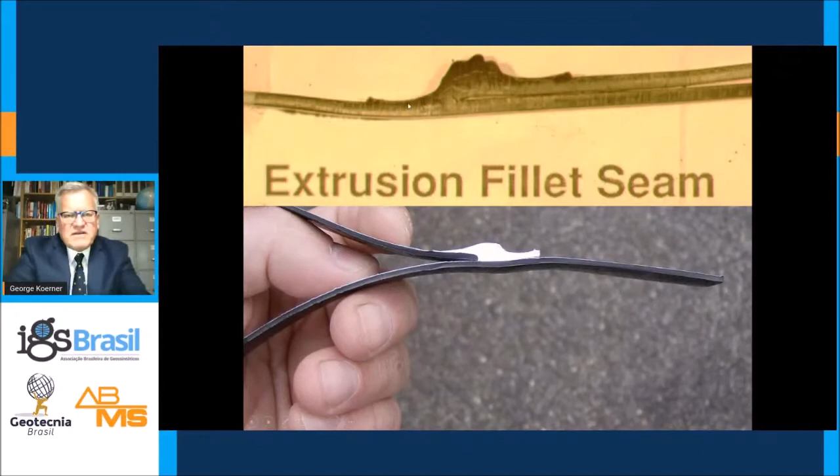In this particular case, it's a white extrusion bead. Maximizing that distance is critically important for a good seam. You are covering all the material that's been ground away, and twice during the day you are going to check the equipment as well as the installation personnel with a trial seam.

This trial seam is typically done in the morning and then after the lunchtime or noon break. It's used to qualify the seamer and their equipment.

It's made on excess scraps of geomembrane and typically should be done on the subgrade soil or the geosynthetic which you're installing. It should be tested immediately in the field with a field tensiometer. If it passes, you can go into production seaming.

If it's no good, you get a retrial. If it's still no good, they need to go through retraining and repair or maintenance of the equipment. This is very important that all of this is tracked, and important to see that records are kept throughout the project. This is the work that's done with trial seams.

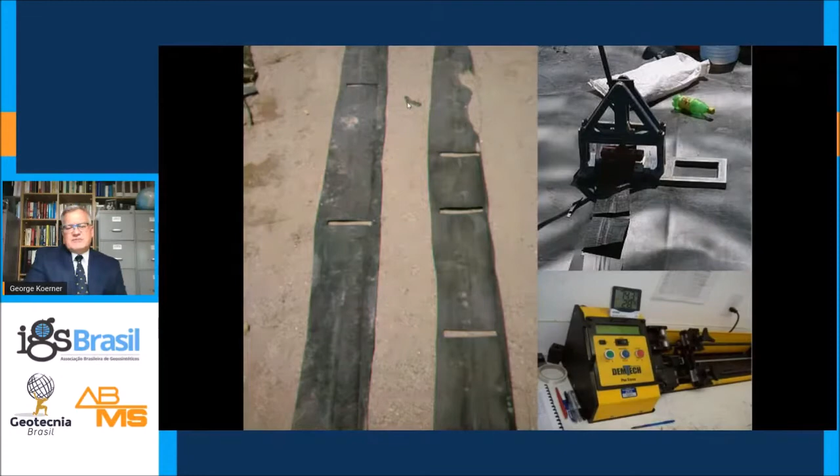There is a field cutter and a field tensiometer. That field tensiometer is typically in a job trailer with climate control so that you get a good response. This is very different than destructive seam testing, which is typically 1 in 500. We'll talk about this later, but please realize trial seams are very different from destructive seams.

The location of the destructive seam is extremely important. You will want to cooperate with the installer and put these destructive seams above the water line or above the leachate line.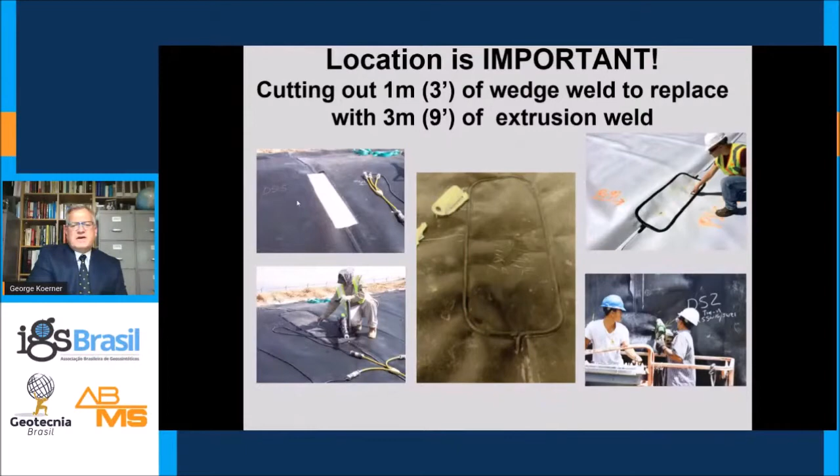Cutting 1 meter holes in the site is going to take out 1 meter of wedge weld, and it's going to be replaced by 3 meters of extrusion weld. And what I showed you earlier is that the fusion weld or the wedge weld is much superior than the extrusion weld for this case.

To give you an idea of assessing this integrity, GRI has produced 3 different practices: GRI GM 29, which gives a carrot and stick approach to expanding the paradigm of 1 in 500 feet for destructive seams; a method of attributes, GM 14; and control charting, GM 20, to reward good installation and open up that spacing for destructive test.

As far as destructive test, these seams are not tested in the field. They're typically sent to a third-party laboratory off-site, usually via Federal Express or DHL, and then tested in regards to shear and peel to determine the adequate bonding of the material.

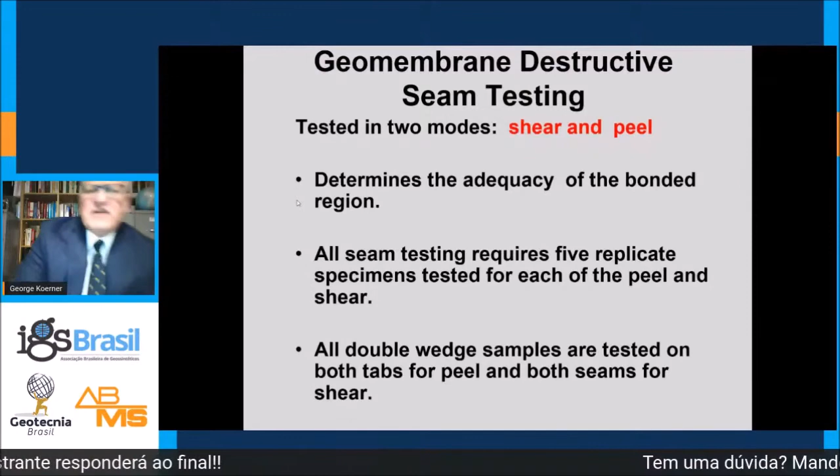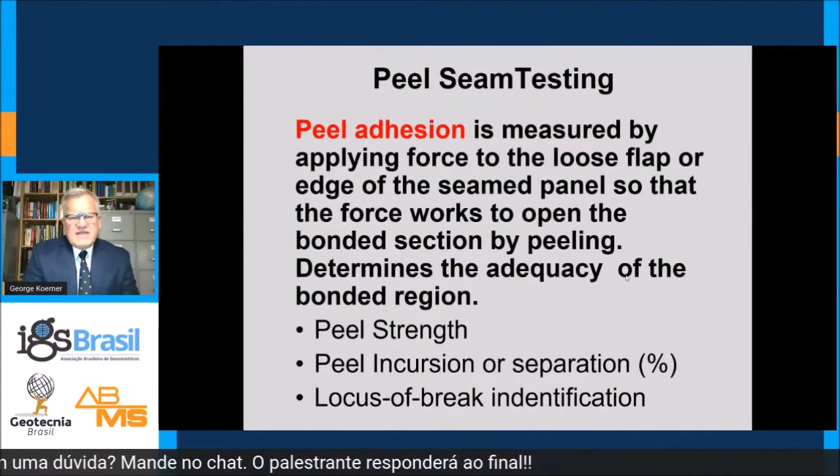You again are looking at 25 millimeter wide specimens. You're testing them and looking for a shear strength, an elongation at rupture, which has to be greater than 50% typically, and then a locus of break indication in that regard. Here you see the shear test set up.

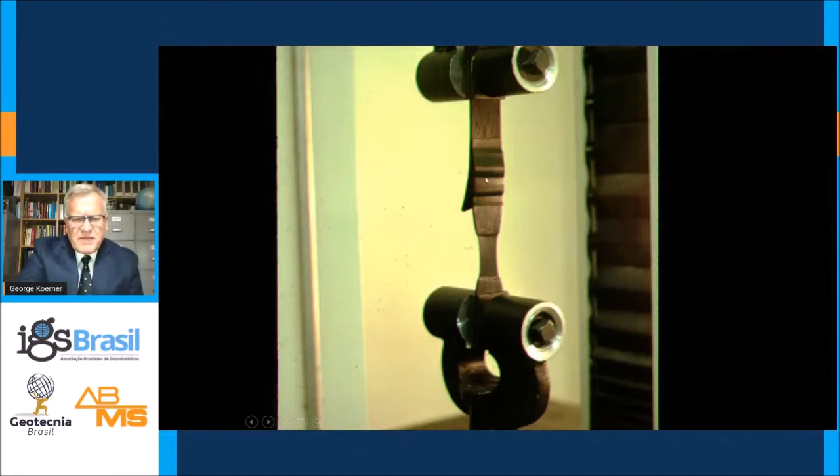We're pulling, and here in the bottom you see a yield of the material. The bond was stronger than the material, which is a good indication. Again, a ductile failure, you'll see those fibrils of the material, and this is a very successful test.

Seam acceptance criteria, like I said, is based on GRI GM 19A or B. They're available on our website. You're always looking for a film tear bond, which is a ductile break where the sheet fails and the seam does not.

You're looking for minimum delamination, particularly in peel, and then the seam strength, the shear, is 80 to 95% of the sheet strength, the as-received sheet strength. The peel strength is anywhere between 40 to 62% of that strength.

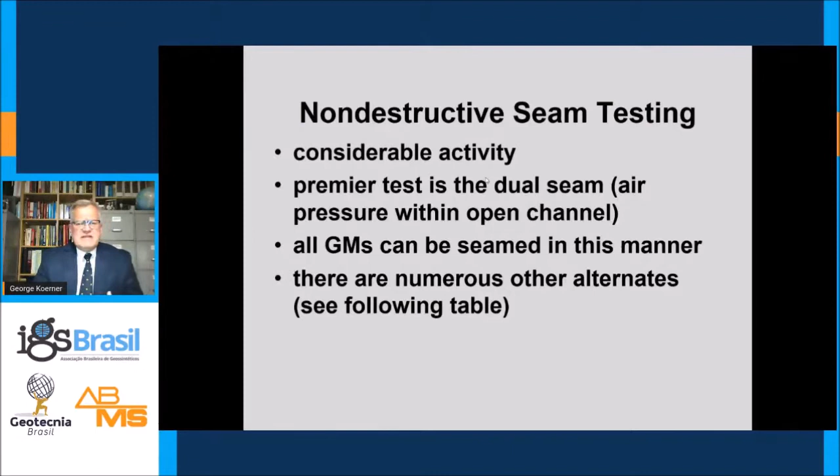Okay, that's destructive testing. Now let's take a look at non-destructive testing, which is certainly a considerable activity on site for the QA personnel. I told you that the fusion dual track hot wedge seam was the premier method for seaming, and it's also the premier test for evaluating the seam. All geomembranes can be seamed in this manner, and certainly there are numerous alternatives for non-destructive testing.

The one most basic, particularly done for solvent seaming, is air lance testing. This is jettisoning high pressure air through a nozzle, and what you're looking for is a flapping or unbond. This is done typically on scrim reinforced materials or PVCs. I never see it being done on olefins except for very thin polypropylenes.

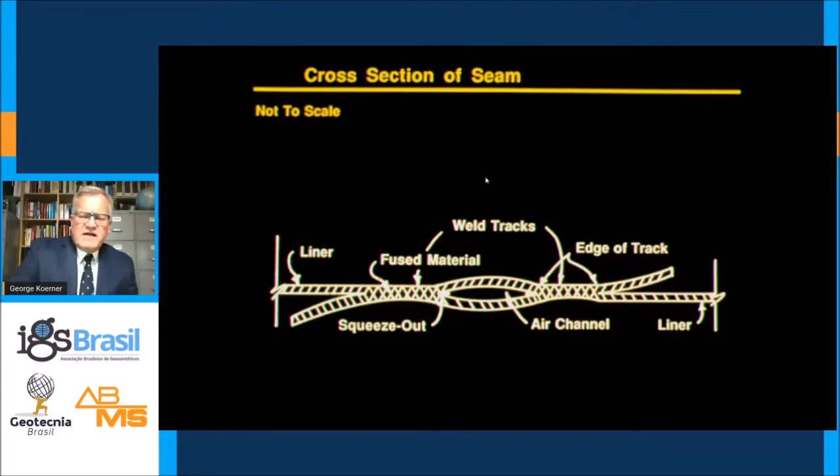The dual track air test is certainly the premier test. You've seen this cross section before, and that air channel is very important to the success of this test, and it certainly needs to be open and clear.

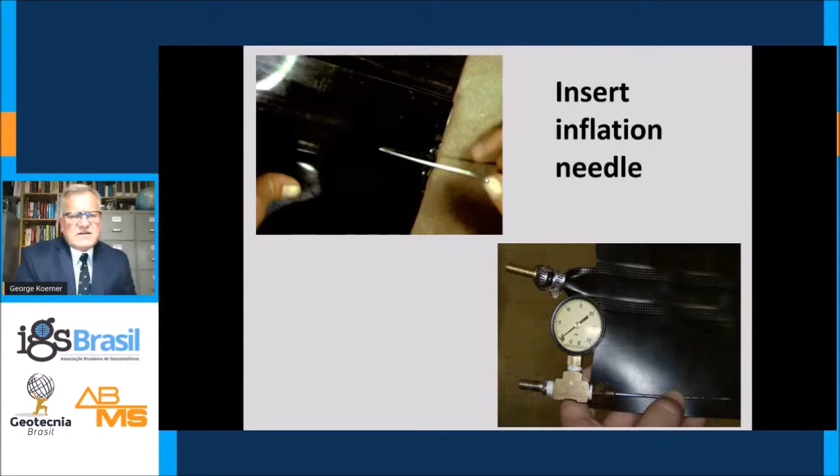You need to isolate the air channel, and you do that by closing off the two ends. That's typically done with hot air, Leister seam, and wide mouth vice grips. You then will insert an inflation needle into the air channel. There are many different needles and apparatuses used for this. You certainly need a good seal, and you can't have a leak in this regard.

You then inflate this with a pump, and then disconnect the pump at the start of the test. As far as the test is concerned, the criteria is set forth in GRI GM6 for air channel testing, the specification. The specifications are based on geomembrane type, thickness, minimum and maximum pressures associated with those types and thicknesses, and a pressure drop over a given time. All of this is called out in the standard.

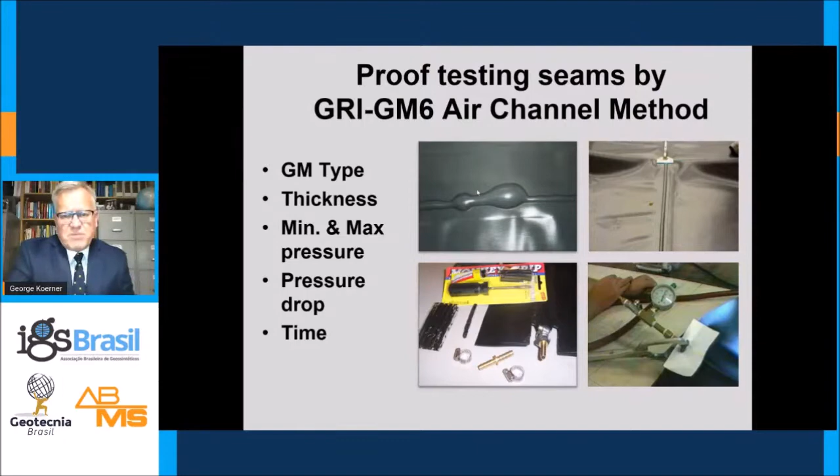What you don't want to see are these aneurysms in the air channel test. This in regards is poor seaming, or indicates poor seaming, and certainly is what the QA is after.

Documentation of this, again, is in an expert system. You see the recording of this in picture form from a site. It's typically a date, the pressure before, the pressure after, the hold time, and the time and temperature, and then the sign off of this.

A lot of photographs are being introduced into QA records. This is certainly very important, and in this day and age of expert systems and iPads on the project, certainly readily available.

Another non-destructive test is a vacuum test for extrusion welds. This is probably the oldest, an adaptation from the roofing industry. It's very labor intensive, and typically requires a soap solution put down on the geomembrane and then a vacuum box placed over top of it. You engage the vacuum, and what you're looking for is bubbling of that soap solution to indicate a leak.

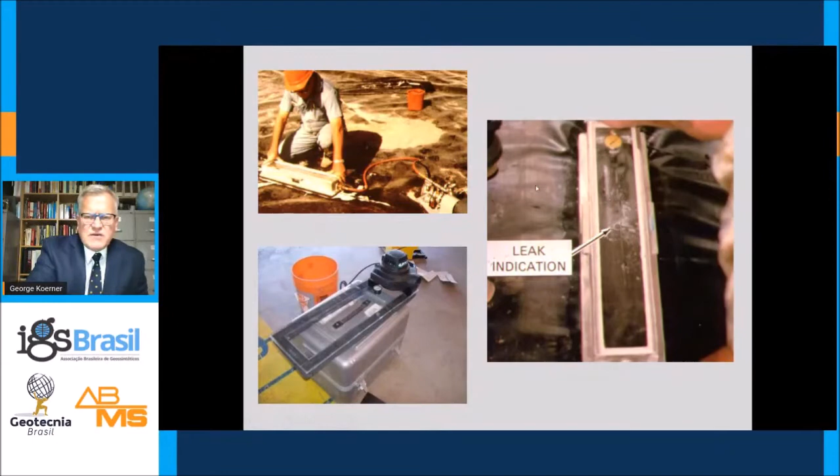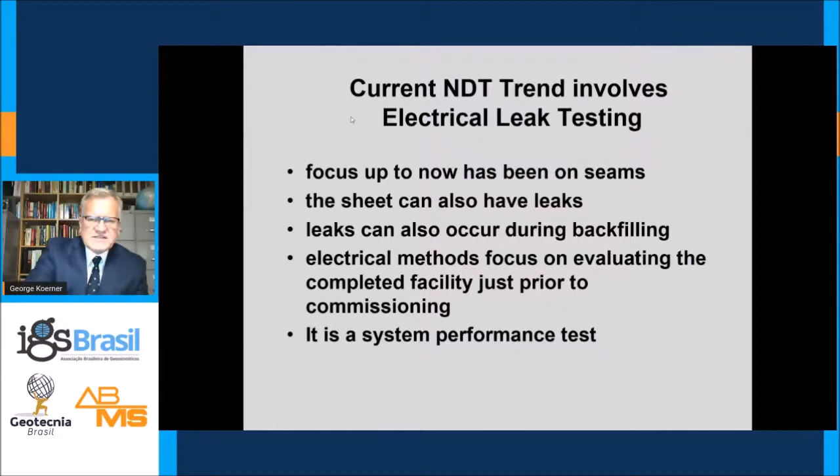I think heavily advisable. With all that said, in regards to non-destructive testing, you should note that the current trend in our industry is to use electrical leak testing of entire systems. It focuses not only on the seams but on the sheet material as well, and it can also detect leaks after backfilling, which is extremely valuable. There are a bunch of methods available to us, focused on the completed system just prior to commissioning the facility. In truth, these tests, which I'm going to describe very quickly, are system performance tests, which are quite handsome and well received in our industry.

The concept of electrical leak testing is typically to use a DC power supply. You have a cathode, which is grounded beneath the liner system, and a movable anode, which is either in the liquid or wet soil above. You're aided by a voltage indicator, and there are many variations to this. You can do this with water, either puddle or standing water. You can do this on soil which has been wetted, or with conductive geomembranes or geotextiles in many cases. What you're basically doing is fishing with electricity.

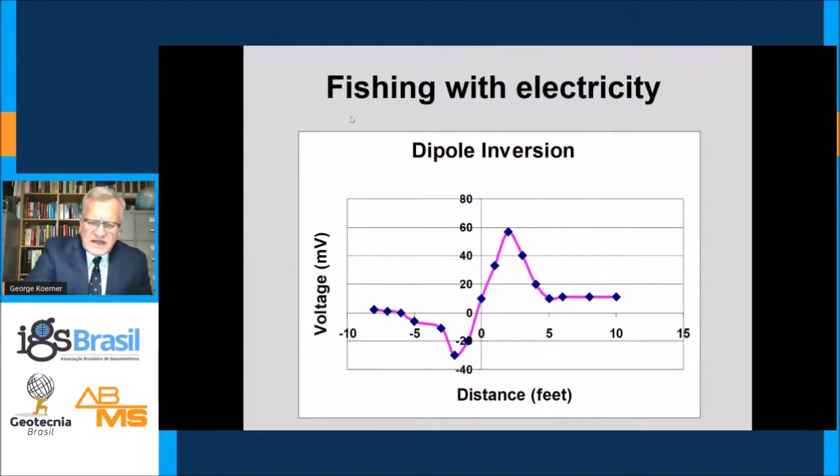What you'd like to see whenever there's a hole is a flip-flop in the voltage. This is particularly the case with the two dipole methods, either water-covered or soil-covered. The water-covered is certainly the premier technique where you can find the smallest holes. There's a lot of activity in this regard. TRI, I have to give them a shout-out. A woman by the name of Abigail Gilson-Beck has been working these standards through ASTM with a lot of help from others.

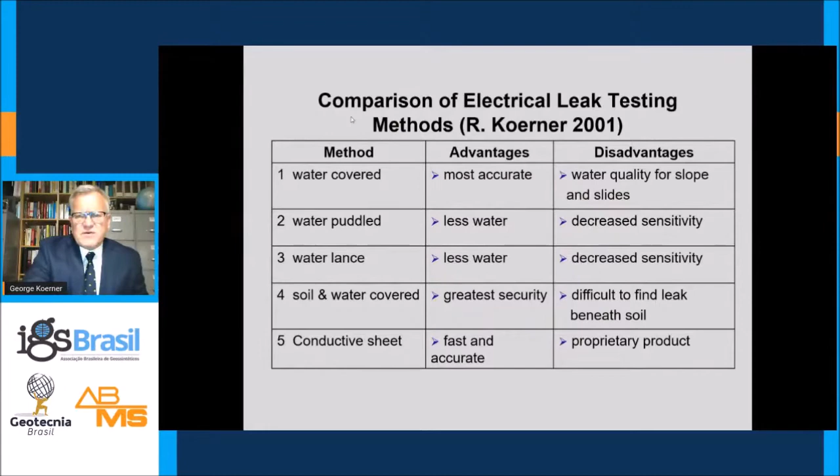Comparison of leak testing, sort of the pros and cons. Again, this is Bob Koerner's work back in 2001. He gives advantages and disadvantages for each one of these. You can read this yourself, but I can tell you this is a tremendous success, and some states within the United States are mandating this prior to commissioning facilities.